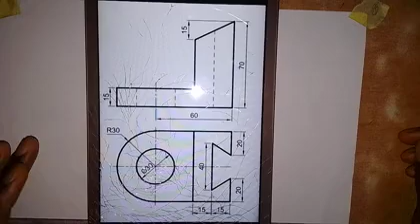Welcome to my channel, and here we are going to be working on the construction of an isometric view of this object.

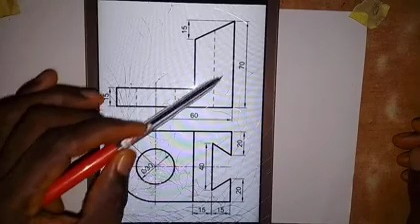These are orthographic views, as you can see on the screen, given as a first angle projection, in which this is the front elevation, and this is the plan or the top view. So we are going to put these two parts together to obtain the isometric view of this object.

We are going to take this point as the lowest point, and then produce the part, giving us an isometric object of this given orthographic views.

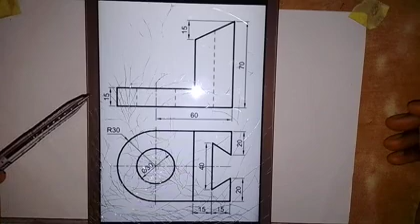Let's look at the dimensions that we have here. In the front elevation, the distance from here to here is 70 millimeters, and for us to draw this line, you have to take a measurement of 15 millimeters down this 70 millimeters to get this point. Then the thickness from here to here is 15 millimeters, and the distance from here to the center of this circle is 60 millimeters.

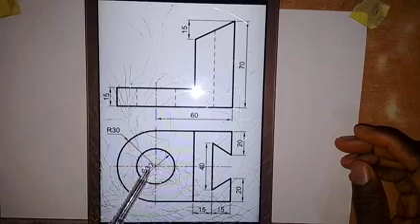The radius of this circle, or this semicircle, is 30, and the diameter of this circle is 30 millimeters. Then the distance from here to here is 40 millimeters, from here to here is 20.

From here to here is 20, from here to here is 15, and from here to this point is also 15 millimeters.

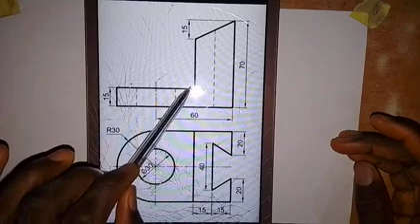So we are going to make use of these dimensions to obtain the isometric view of this object. The first thing I'm going to do is produce this shape as you see here, and you are going to get it done with ease.

Let's start. The first thing we have to do here is draw a short horizontal line. I'll just put it somewhere around here.

Then with my 30-degree set square, I'll be making use of this set square. I'm going to draw a line in this direction, like this.

Then I'm going to draw a short vertical line at this point, a short vertical line at this point. So, I'm looking at the object as I have it here.

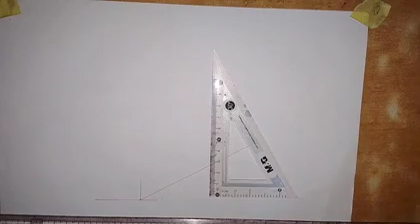So then I'm going to do an addition of this 30, that's the radius of this semicircle, plus this 60, that gives us 90. So I'll take a measurement of 90 millimeters on this line from this point. So here we have 90 millimeters here.

At this point I'm going to erect a vertical line, at this point I will erect a vertical line like this.

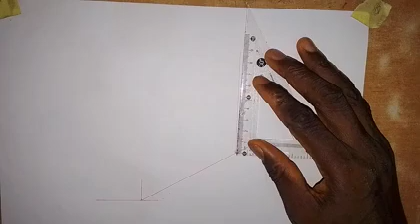Then on this line I will take a measurement of 70 millimeters off from this point. So this is 70 millimeters here.

Now the next thing I'm going to do is draw a line in this direction, like this.

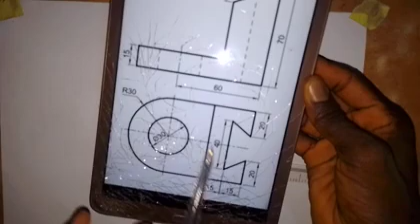Having done this, the next thing I'm going to do is take a measurement. I want to bring the object so that we can see it. The total distance from here to here is 30, as we have 15, 15. So from this line to this end is 30 millimeters.

So I'm going to take a measurement of 30 millimeters from this point. So this is 30 millimeters.

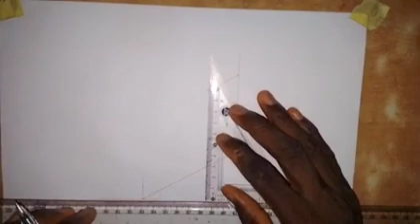So at this point I'm going to draw a vertical line, down here. So this is the vertical line.

Then I will also take a measurement of 15 millimeters from this point. So 15 millimeters from this point up, this is 15. So here I will draw this line, in this direction, to meet this vertical line.

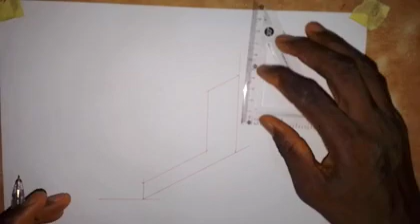But I'm going to take a measurement of 15 millimeters down as I've shown it in the drawing. So we take 15 millimeters down, and then we are going to join this point together, like this.

So based on what we have there, as I said, it is this shape that I wanted to produce first, which I've done now.

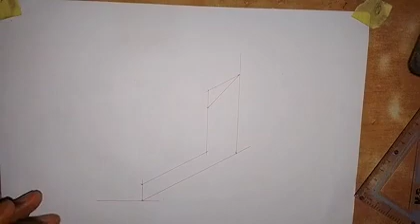So you can see it as we have it here. Now let's go and work on the other part.

The first thing I'm going to do now is, with my 30-degree set square, draw a line from this point in this direction. So from this point, it goes to this side.

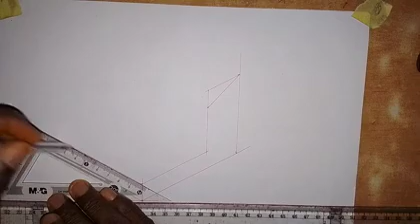Then at this point also, I will draw a line in this direction. Then coming to this point here, I will also draw a line in this direction, and then I'll come here also. At this point, I will draw a line in this direction.

Then I will come to this point here and draw a line in this direction. Alright, so we have this.

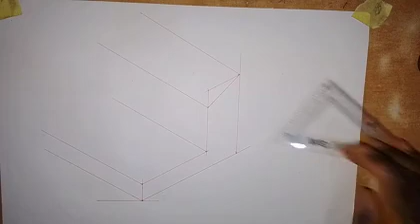So let's take the width, from here to this side. The width from here to here is going to be 60 millimeters, because from here to here is 30, and from here to here is 30. So that gives us 60 millimeters.

So we take a measurement of 60 millimeters from this point to the left side. So this is 60. All you have to do now is draw a vertical line at this point, and then we transfer this point to this end here.

Then we also take a vertical line up to touch this line, so we draw a vertical line here. So now if you look at this line, it's what is slanting.

So what I will do is come to this end here and take a measurement of 60 millimeters to this side. So this is 60 millimeters. I'll just join these together, because this line is a non-isometric line, so we have to join like this. So we have this now.

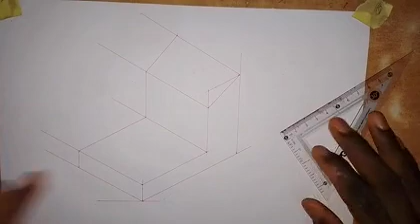Then the next thing we are going to do here, let's work on this surface. Based on what we are given, let us produce this shape. From here to here is 15, so let us get that 15 millimeters. What we have to do is take a measurement of 15 millimeters from this end. So we have 15 millimeters from this end.

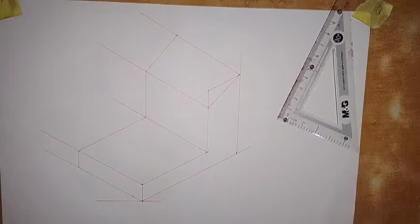So what we have here is correct, because we took a measurement of 30, which is the normal. By the time we draw this line, it will be longer than this one, because this is a non-isometric line. So we are right.

What we have to do is come onto this surface here and take a measure. It's on this surface that we have to take 15, so we take 15 here, not on this line. So that is what we have. Let's take note of that.

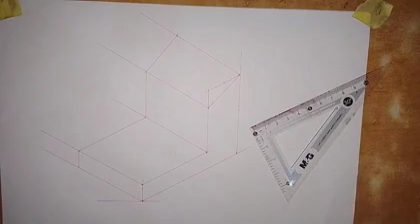What I will do now is draw a line, a vertical line, to touch this sub point. Then at this point, I will now transfer this point to the other side. So I'll just transfer it like this to this side. So we have this now.

Coming to this end, I will take a measurement of 20 millimeters from this end to this side. That is 20. Then I will also take 20 from here to this side. This is also 20. So that's what we have here.

So looking at what we have here, there's something we need to take note of. We have that the distance from here to here is 40 millimeters, so we have to work that out. So on this line...

The midpoint, so we take the midpoint, is what is 30. Then we take 20 to this side, so this is 20. Then we also take 20 from this midpoint to this side, so this is 20. So here we have 20.

So all we are going to do now is join this point together with this point and make it a thick line at once like this. So we join like this, and then I'll also join this point together with this point, so make it a thick line. So that's what we have there.

So at this point now, I will draw a vertical line. I'm going to make it a thick line. We are going to see a line going down like this, down to the base. Then this line also we make a thick line, so we make this line a thick line like this. Okay, so we have that thick line like that.

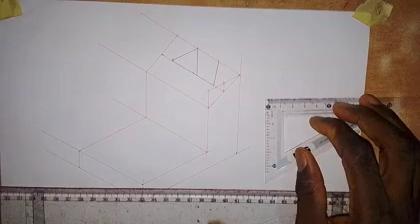So I will stop this one here for now because I want to draw the semicircle that we have here. I'm going to draw a curve here, and also an isometric circle at the center. Let's go and see how that can be done. So first of all, start with this curve here.

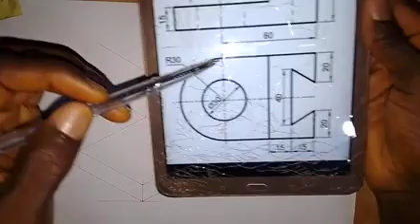So with radius 30. What we are going to do is produce an isometric square on this surface of length 60 millimeters. If I take this measurement, this is already 60 millimeters, so this is already a square. So what I'm going to do is get the midpoint.

So I'll get the midpoint. This is the midpoint, 30 on this side. Then I'll also get the midpoint here, which is also 30 from here. So this is 30 millimeters.

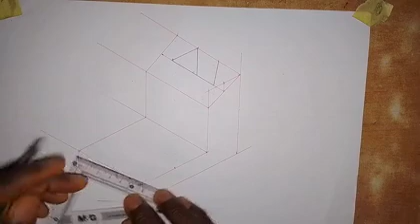So I'm going to transfer this distance. I will transfer this point here to the other side as a center line. Then also I will transfer this one to the other side as a center line like this.

So then I'm going to join these points together, these longest corners. I will join them together like this.

Okay, so because I'm just producing a semicircle here, what I'm going to do now is join this point. I'll join these 2 points together like this.

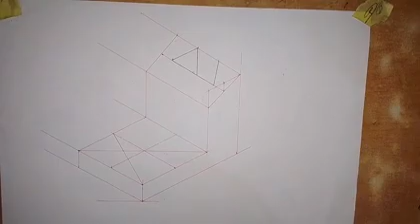So we are going to make use of this center, and then we make use of this center. So we take our compass and put the midpoint here at this point, where these lines intersect. Then I will extend the pencil point to this point here or to this point, so any of the two.

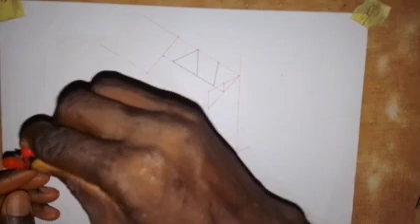So I can go on and draw an arc here now. Just take it easy. So I can draw an arc here like this. Okay, so this is what we have.

Then I will put the midpoint here at this point, and extend the pencil point to the point that we have here. Then I'm going to draw like this. Alright, so we have it here now. So here we have this curve here.

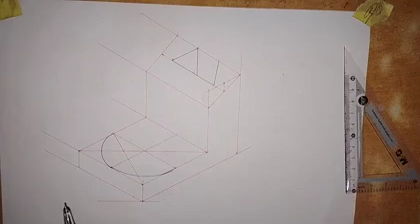So the next thing we are going to do, we also have the curve down here, but I'm going to produce that curve down here. So what I will do is take my set square and draw a vertical line down. I will take a point somewhere around here, and then draw a vertical line down.

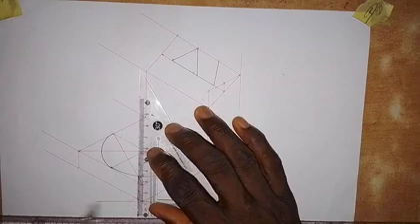And then coming to this point here, I will also draw a vertical line. So I'll come to this point, and then draw a vertical line. Then coming to this point here, I will draw a vertical line. So I'm going to make use of this.

So the thickness is 15. From here to here, from this point to this point is already 15. While this one, I'm going to take a measurement of 15 millimeters down from here. So this is 15 millimeters here, and then from this point also I will take 15 millimeters down. This is 15, then this is already 15. So this is 15 millimeters.

So it's only this one that I will come here. I need to come down a bit. Then I will take 15 millimeters just down here.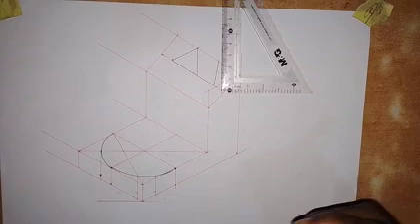Okay, so all this I'm going to join them together with the use of the French curve. So I will join them together with the use of the French curve. So here it is. So we are going to join from here.

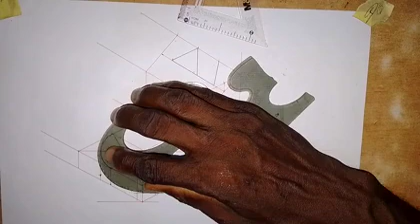So you join these 2 points together, and then so these 2 points, we join them together like this. Okay, then so these 2 points here, or these 3 points, I can join them together like this to form that curve. So this is it.

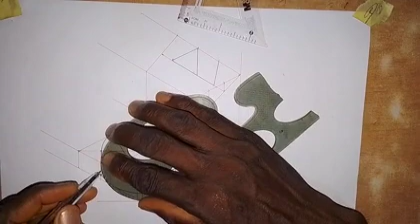So this is how the curve will be. So this one we still need to make sure we bend it a bit. Okay, so just use your French curve to do that.

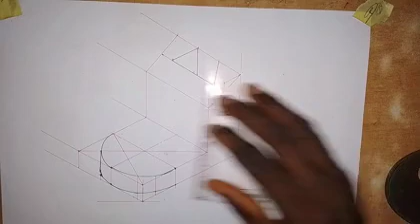So now, so this point, I will make them thick, and maybe I will draw a thick line through this. So this is what we have here on this surface. So what we are left with is the isometric circle. Alright, what we are left with is to produce this isometric circle here on this surface.

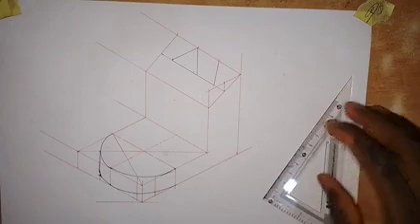So they both have the same center. So the diameter of the circle is 30. So the radius is 15. So we are going to be taking a measurement of 15 millimeters from this center here. So we take 15 millimeters to the left side, and we take 15 millimeters to the right side, making 30.

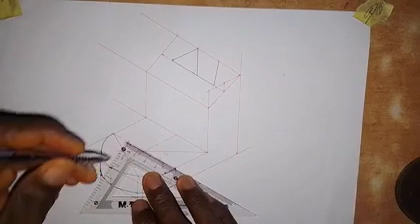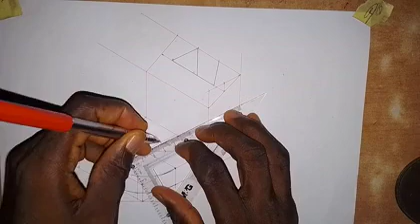Then here on this line, so we take 15 millimeters down here. So this is 15 millimeters, and then we take 15 millimeters here. So we are going to create an isometric square on this face here. So it goes like this.

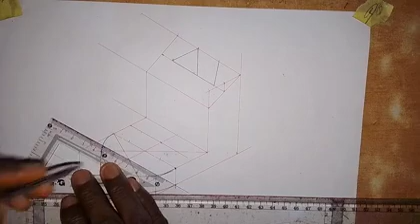So we are going to draw a line here in this direction, and we also draw a line here in this direction. Then here also, so we draw a line, and then so coming to this point, we also draw a line. So we have an isometric square here.

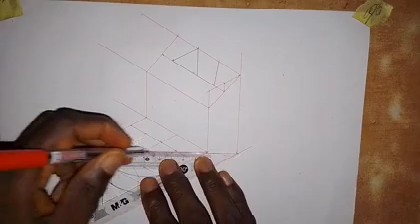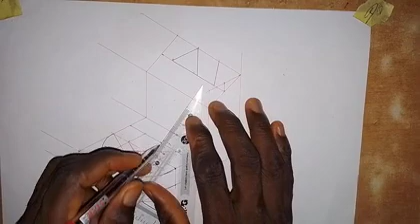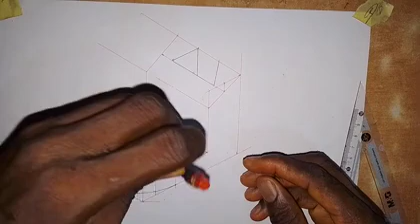Alright, so then with the compass, okay, so putting the point of the compass here at this point, so we extend to this point here, and then so we are going to draw an arc. So we go on, and here we draw an arc like this. Okay, so we have that.

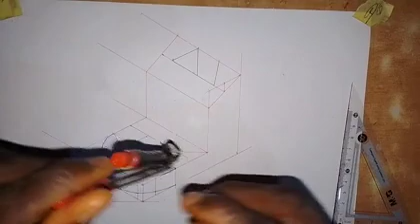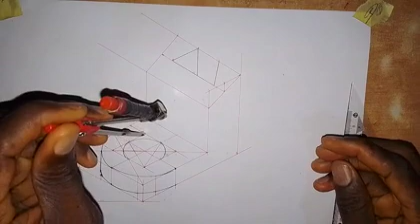Then we put at this point, so from here, so we draw an arc. Okay, so we have that, and then we put at this point, so we extend it to this point here, and here we draw an arc like this, and then so at this point here we draw an arc like this. Okay, and let's set it well.

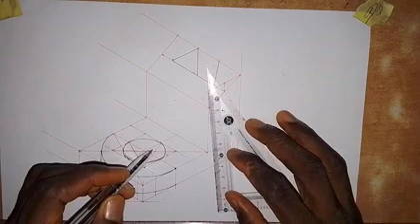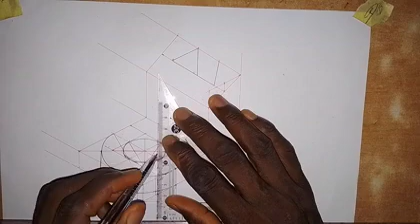Alright, so we have this, alright, so we have the circle here. So let's check if you can see a little part of the down part of this circle around here. So I'll just draw a vertical line here, and then so coming to this point, I'll draw a vertical line, and then so take a point here, draw a vertical line.

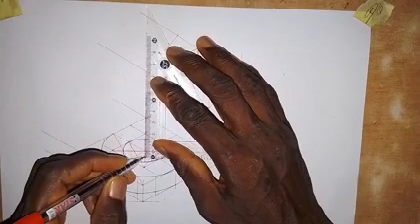So take a measurement of 15. So this is already 15 millimeters. I think this is already 15 millimeters. So on this line, I will take 15 millimeters. So from this point, 15 millimeters.

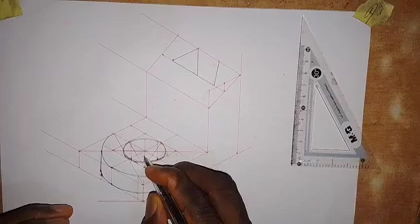So I'm going to join these 3 points together. So this point, and this point, I will join them together with the use of French curve, because I can see a little part of the down part of the hole. So here, so I will also join this together. Alright, so this is how it will be.

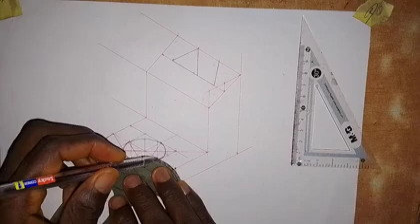Alright, so this is what we have here. So, and all that we need to do now is to make this line a thick line. So I'm going to pause the video and do that. Then when I'm done, I will come back and you see what I've obtained.

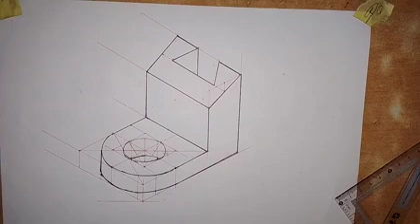Alright, so this is the isometric view of this object. As simple as I've done it here. All you have to do is to practice. Practice and you will become a master at this. Thank you. Keep on practicing and God bless you.